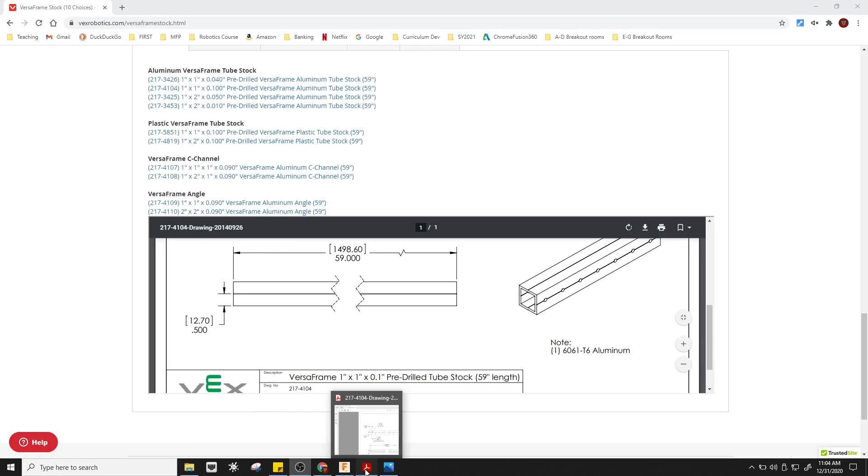In this case we've done a custom example of a VersaFrame. So this is the VersaFrame stock. We get it from Vex. If you scroll down they have a bunch of options, but then they also have these drawings of the parts themselves, and that is basically what we're going to be making.

Now we are CADing up the thick VersaFrame extrusion. That's this part number 217-4104. And there are a couple things that I'd go over with this drawing. One, I don't love the layout for this particular version. For example, it does the front view, the right view, and the bottom view.

I generally prefer to have the isometric view in the upper right hand corner and then run front, top, and right. But that's a preference of mine. The thing that I do like is that they've got these long break lines, and we'll go over how that's a problem when we make it. This is kind of the guidance that we used for making the VersaFrame part.

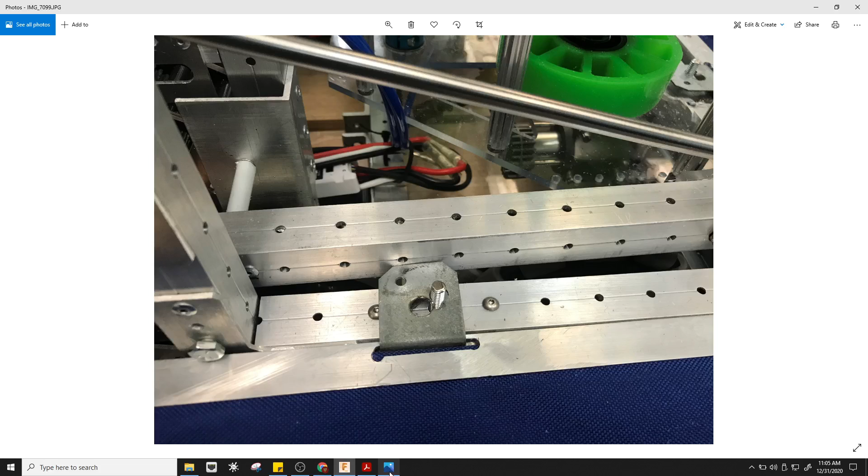So we've got the VersaFrame part in our CAD, but one thing you're going to notice is that the holes are different than those in the drawing. So if we take a look, there's actually kind of three versions of the Vex VersaFrame at this point. In general, we'll use a thin piece. This one actually ends up being thick.

It is a 40 thousandths thick VersaFrame, and previously the holes were offset on that one and on all four sides, but now they are not offset, but they're still on all four sides. And the thick version, which this piece is, originally had a side that had no holes, and then a side with holes. Now all sides have holes, and the holes align. They're not offset, so the top and side holes are the same.

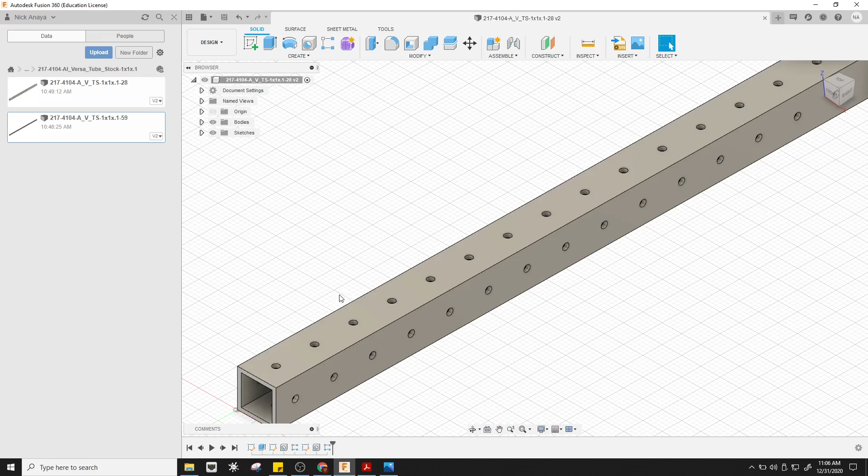So that's actually what we've CADed here, where the holes here and here are offset ½ an inch and then an inch apart for all of the holes, and that is what we've CADed, and this is what we seem to get when we buy it. So that's the disclaimer that there's some different options for the way you receive this. This is the way that we've received them the most recently.

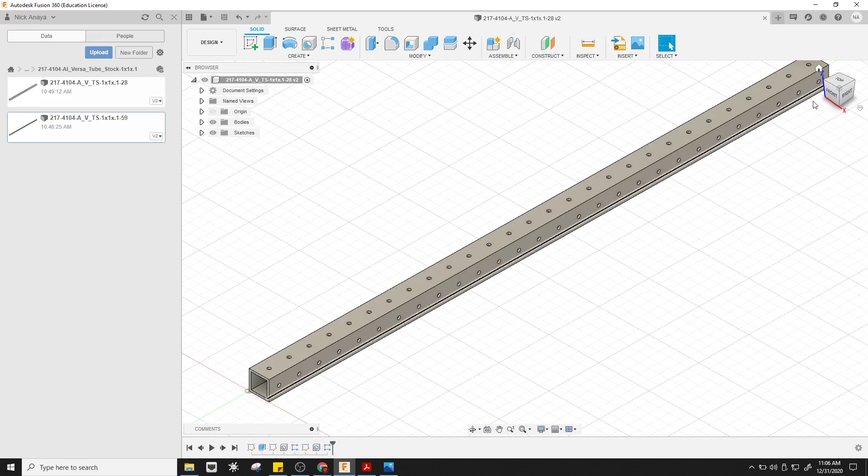So first thing I want to do is talk about our sides. So we created this extrusion with our Z and X axis set up, with the top looking down here, where then our origin is in the back left hand corner. Now this is very useful with respect to CAM.

So if we're going to end up doing machining on the top of this, then in general we would touch off that back corner and set that to our origin, and then set up all of our measurements from there, because when it is in the mill, we're going to have that back left-hand corner. The back side is going to be against the fixed side of the jaw on the mill.

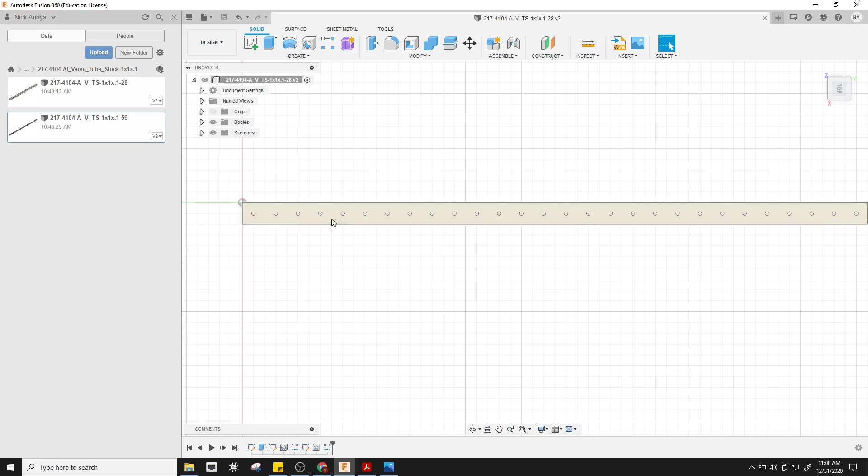And then however far left we put it, that'll be kind of our X0, and so to the right is our X positive, and then down towards us is our Y negative. And then up and down with respect to the part is going to be the Z axis. Okay, so that's how we've got it laid out in our CAD file.

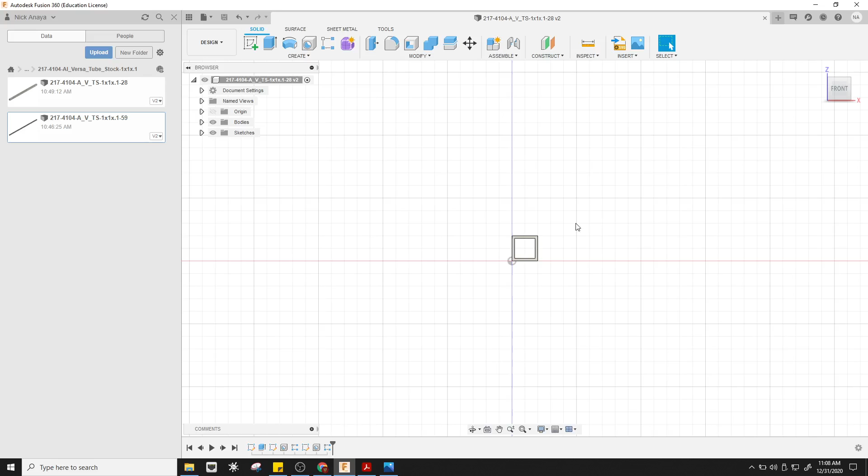However, when we do that, then we end up with the end of the part being considered the front, which is not ideal for us. So in this case, we would prefer to have the front have more information about the overall dimensions of the part, and so we're going to redefine the front as the first step here. So if I click on my view cube on the right hand side, I'm going to right click on this and say set current view as front.

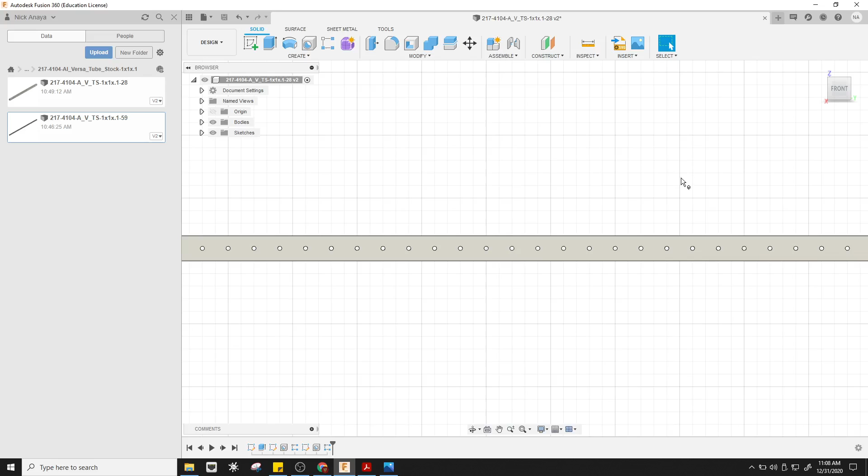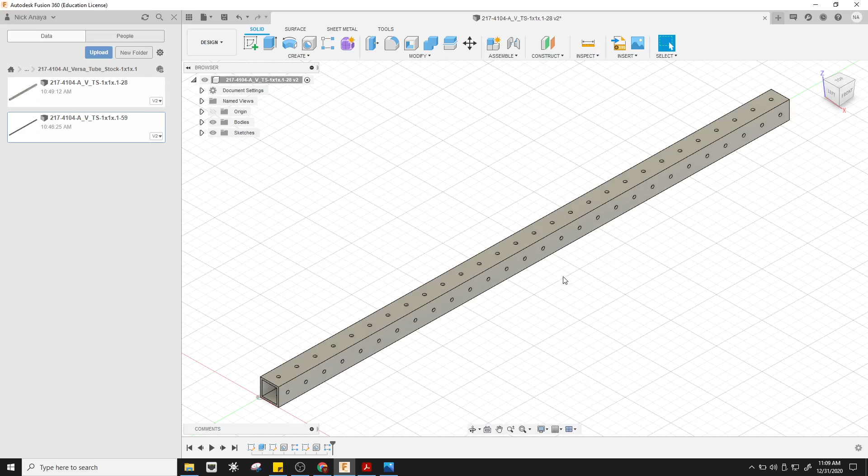Now when I go to my home position, I've got right, front, and top, and that is all presented as such. And next I'm going to go ahead and create a drawing. So if I click up under design, drop down to drawing and say drawing from design, then that's going to give me an option. Now for the drawing itself, we're going to use a template.

We've imported a template for our use, and we've set it up kind of the way we like it. So I'm going to go ahead and change the template from scratch to Lindblom drawing, and then the contents are the full assembly, and we'll click OK.

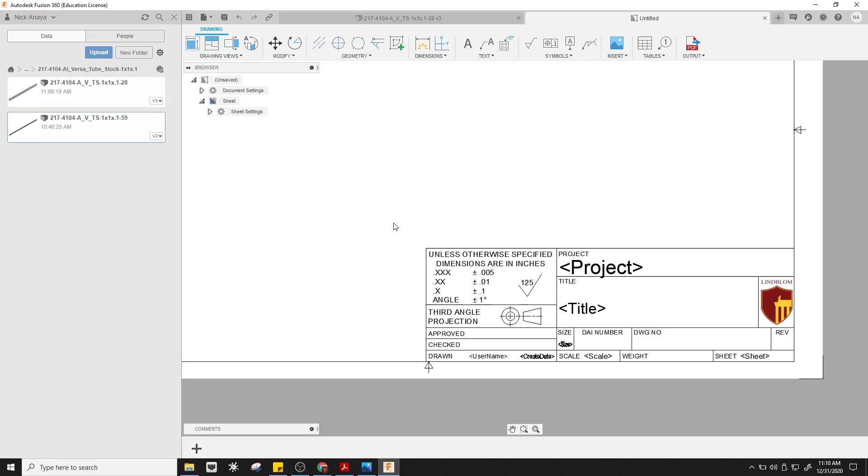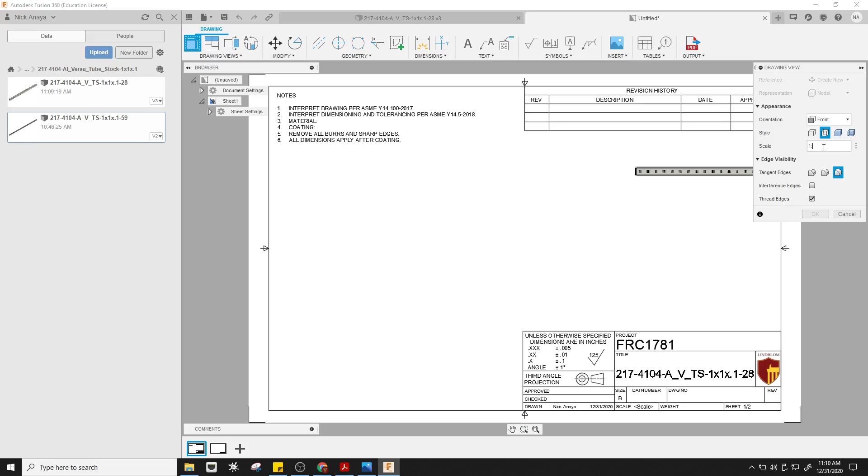So the first thing I'm going to do is I'm going to go ahead and place the front view. I want to change the size of this to maximize how much will fit on the page. Looks like I could probably get to 3:1 or 1:3 reasonably. So I'll go ahead and place the front view there. I will place and then I'm going to make sure, click OK. That sets up the front view.

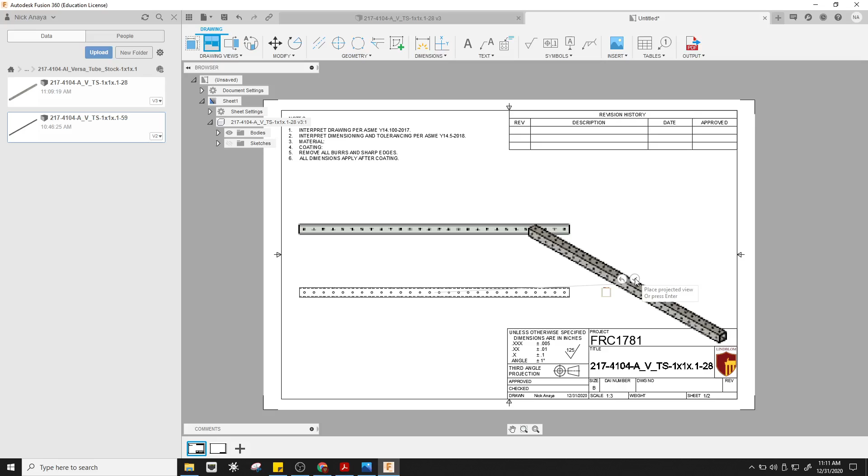Then I'm going to go ahead and create my projected views. So up top, click projected, click on this, place a top view, and then move to the right and place a right view. And then click the little check mark. And that is done.

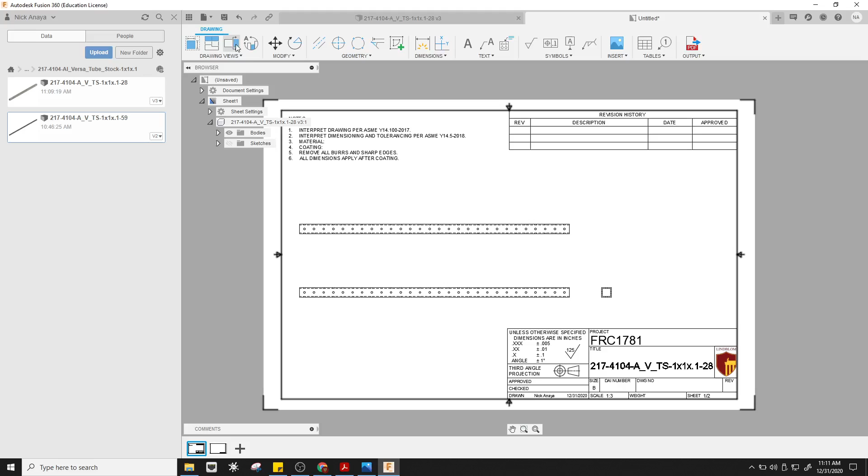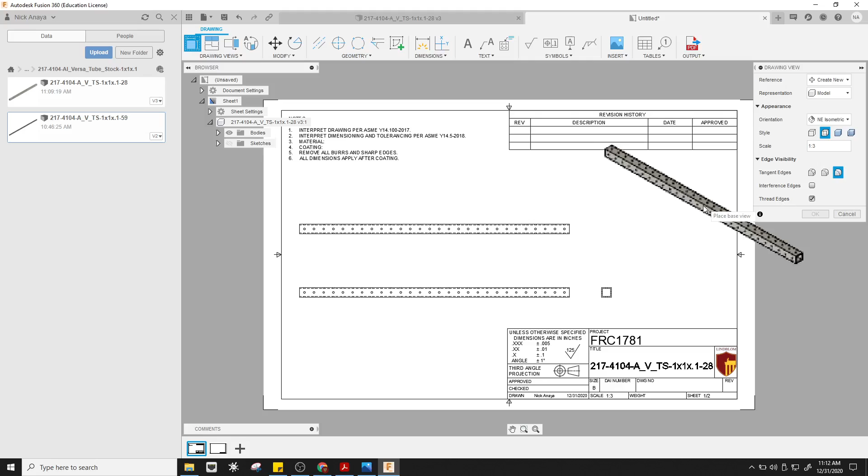So now I want to go ahead and place my isometric view. So I'll go ahead and pick this base again. Then this time I'll change this to, again, 3. I want to change the orientation to be, say, home view. Now that's a little long, so actually, let's go ahead and switch this over to northeast isometric. So this actually shows me the correct orientation.

I'm going to turn on my shading in this case. So now looking at this, this is the front, this is the right, and that is the top. 1:3, that looks good. So we'll click OK. So now I've got my isometric, and I've got each of my views here, and then the end view.

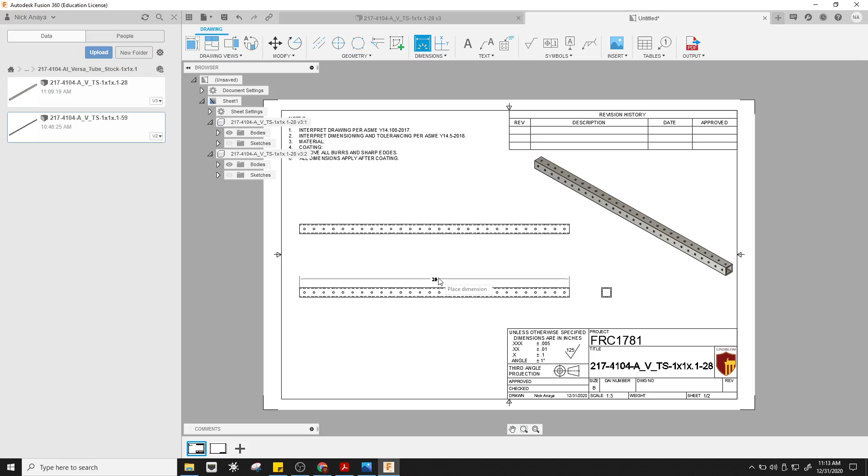Now we're going to go ahead and we're going to place our dimensions. I want to start off doing the overall length of this object. So in this case, we are 28 inches long. That's good. Then I'm going to go ahead and do the height of the object, which is 1 inch. And then I'll do the depth of the object, which is 1 inch. And now I have the primary dimensions of this extrusion.

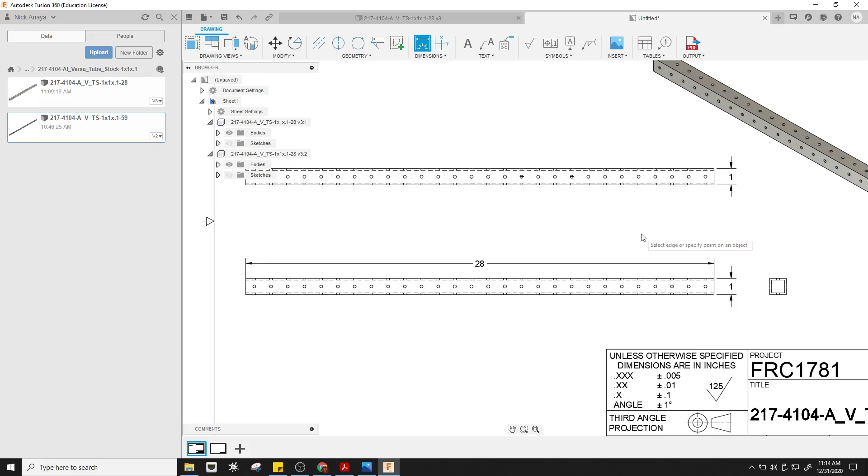That's all right. What we'll end up doing to kind of help us with this is we'll end up using our detail views. So in this case, we go up to here and we select detail view, and we're going to first do a detailed view of the end. And so we'll capture this by clicking on the center, then clicking again, and then getting this detailed view. And then in this case, we're going to go up, we'll place it, and then we're going to scale this to be, let's try 2 to 1, or at least 1 to 1. All right.

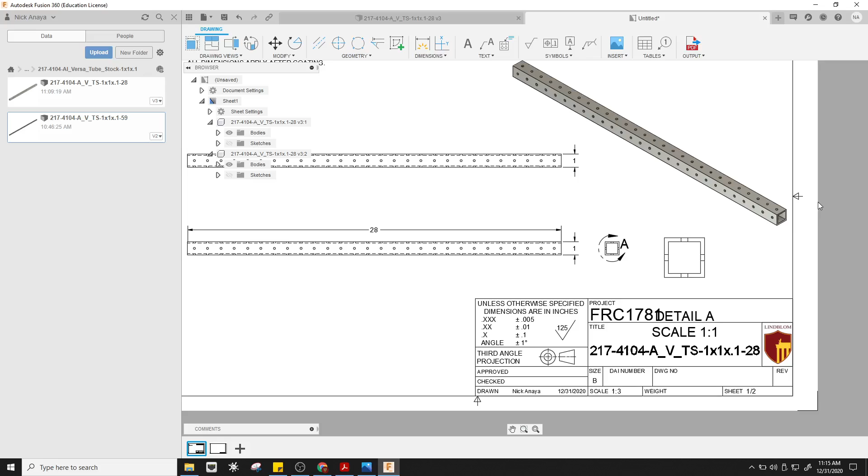And so what that does for us is now it allows us to go ahead and apply the dimensions that would end up being really small in a larger format. So for our height dimension and our depth, we've already got our 1 inch and 1 inch. So we don't really need that. If we want, we could take a look at the other drawing and see they're identifying the wall thickness. They also put the overall dimensions there.

That is another option. So instead of drawing it at the end of the extrusion here, they put it on their drawing. So in this case, perhaps it makes sense for us to do that as well. So I'm going to go ahead and delete this and delete this one. And then I'm going to apply those dimensions on the detailed view. So here, click 1 inch, here, click 1 inch, and then in this case, we'll go ahead and we'll do the thickness. 0.1 inch, and the thickness here.

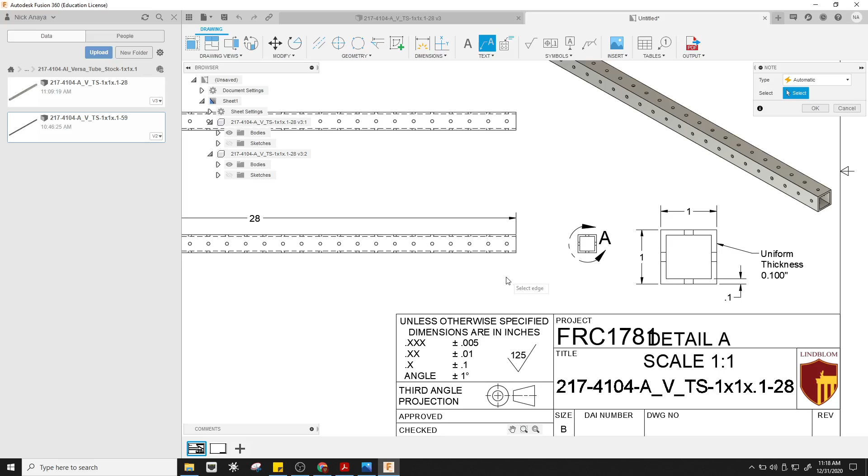All right, so now we have a note that says it's uniformly thick, we have that dimension, we have the height and width of the extrusion, and that is all applied in this detailed view. All right, so we'll click OK. Now we're going to go ahead and do a detailed view of this section so that we can basically show the holes and everything for the extrusion.

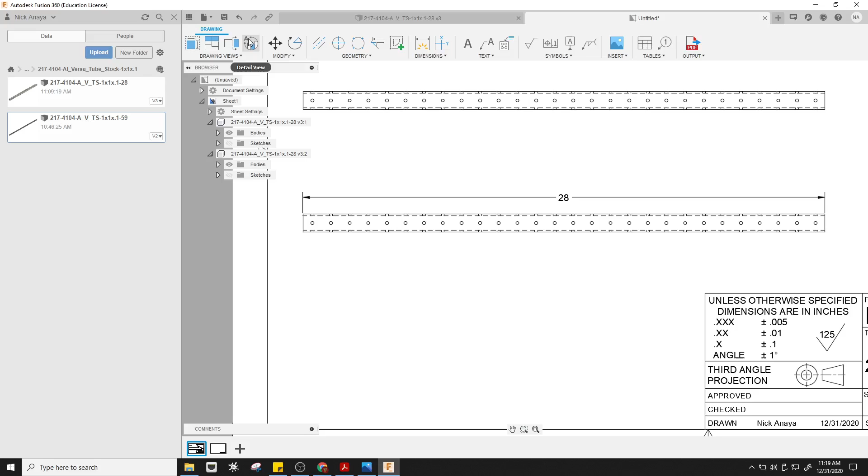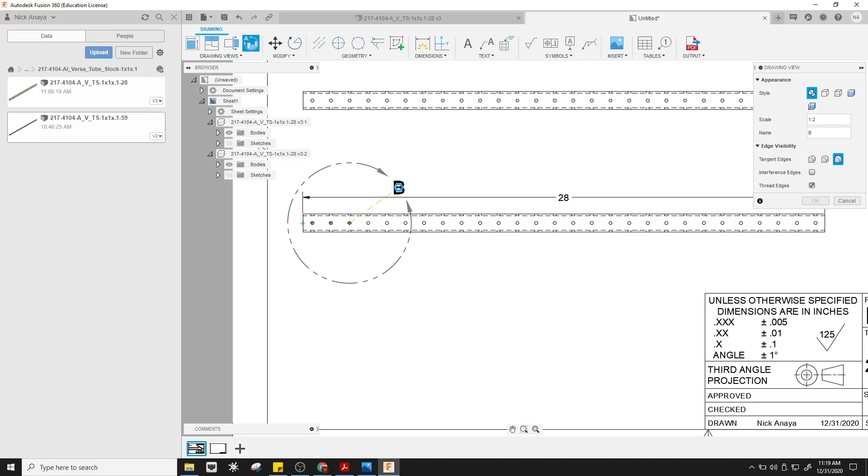So we'll click detailed view again. Click on this object. You always click kind of the center of where you want the detailed circle to be. So I'm going to go to this other hole and then give myself that much room. And in this case, let's change it to 1:1. And I should be able to place that here. And click OK.

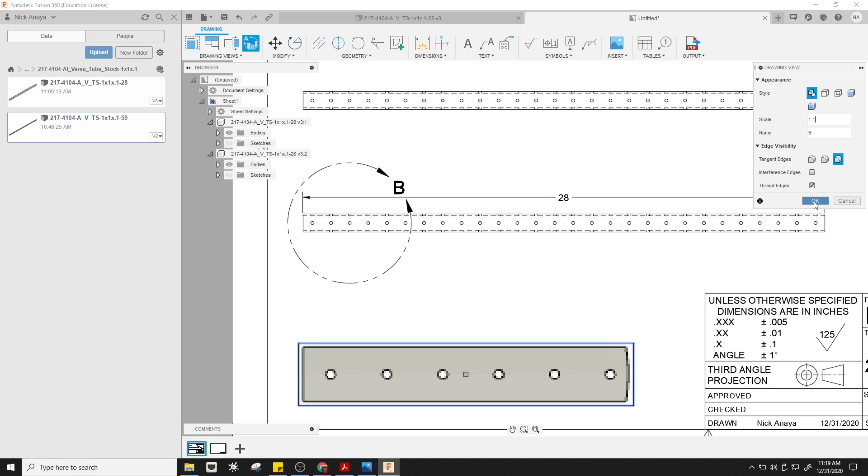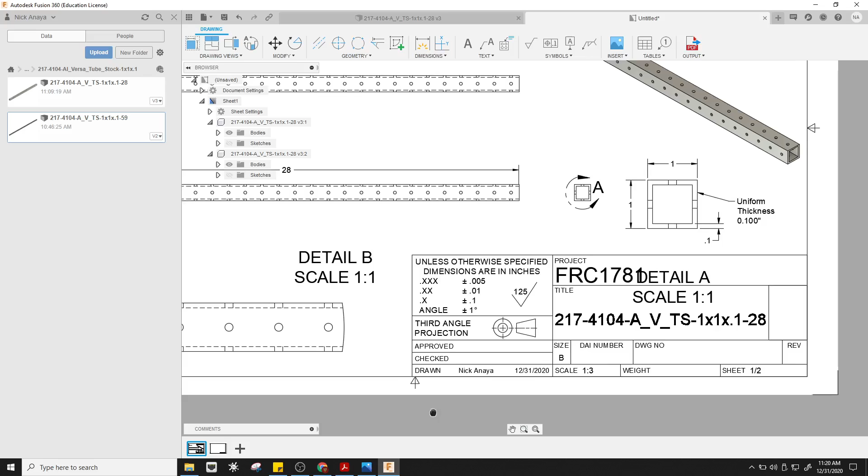So now I have a detailed view of the object. I need to move this note here. That's actually on the page. And also I need to move this note onto here.

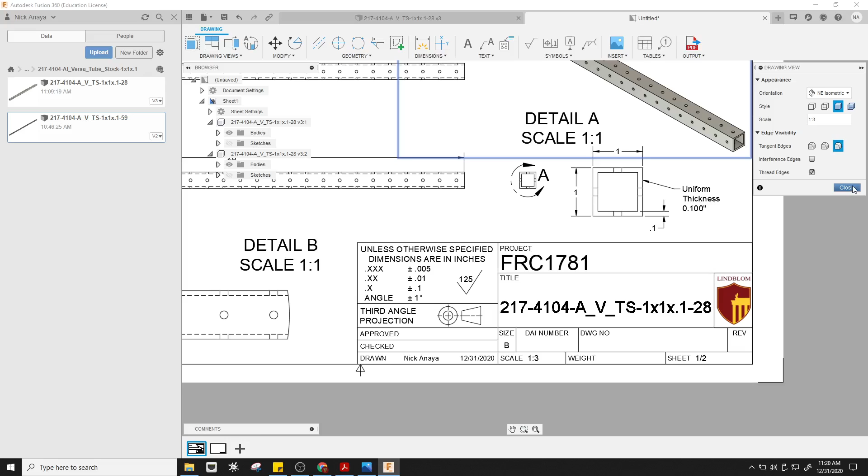Okay. So now that I have this detailed view, I'm going to go ahead and add additional dimensions. The first thing I want to do is add center marks to each of the holes. So here. Go ahead and just do those 5.

The next thing that I'm going to do is I'm going to dimension to the center line from the top edge. So here to here, and then set that dimension there. In this case, I'm going to try to slide this out just a touch more. Move this guy closer. All right, so now I have the offset for the hole.

And now the last thing I'm going to do is I'm going to end up with my chain dimensions for each of these holes. So I first click and add a dimension from the edge to my center line here and pull that up. And then I'm going to move this guy to the center.

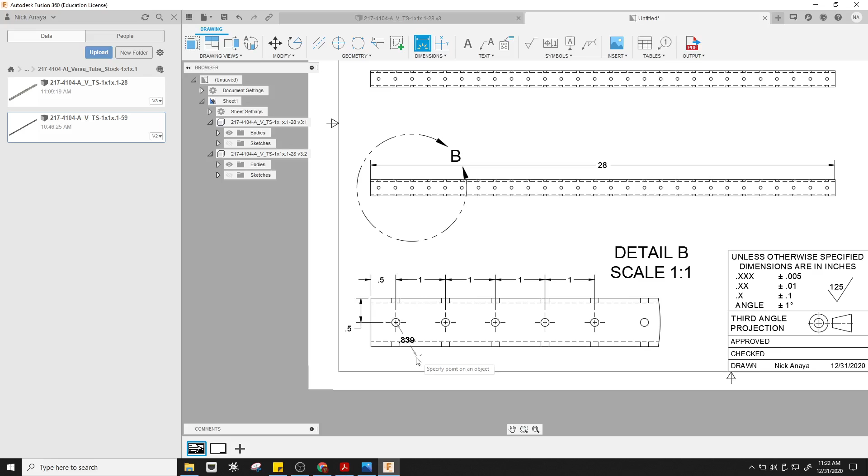And now the last thing that I need to do is I want to go ahead and provide a dimension for the hole size. So I will click on the edge of the hole and pull my leader line. Actually, that ended up being the wrong way. So dimension. And then I want to come off at an angle, click, and now I have the dimension for that circle.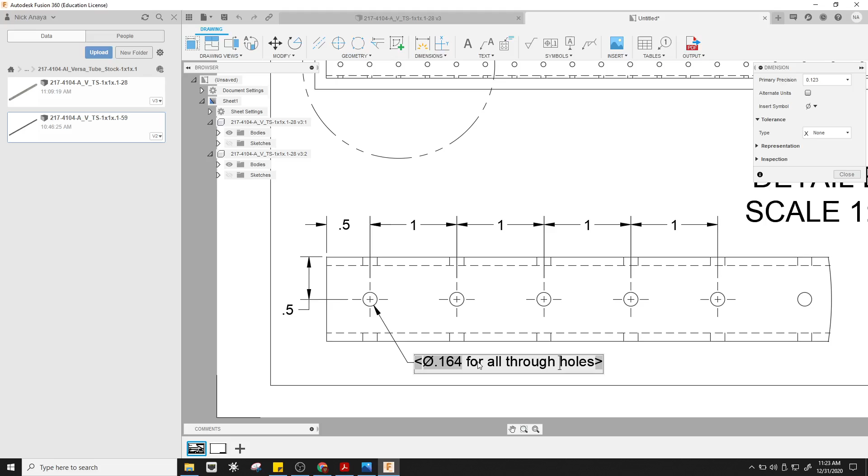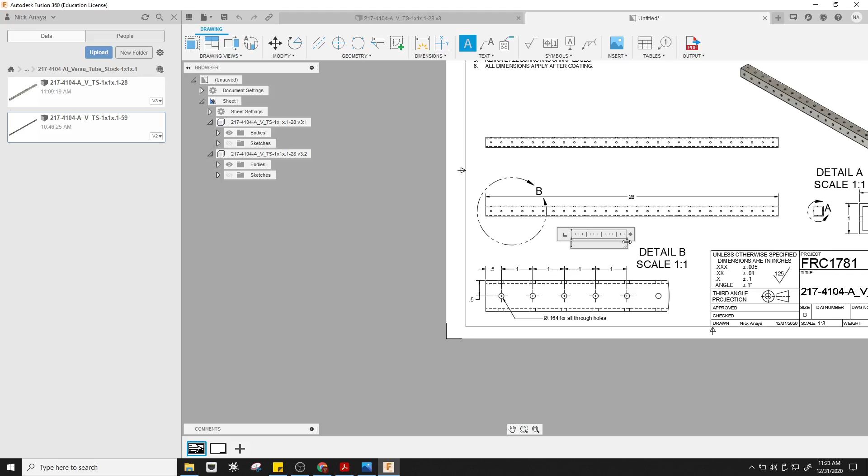If I hit escape, then I double click, I can actually then add a note that says 0.164 for all through holes. And so now that kind of covers all of the different holes. It gives us our chain dimensions, and we might add one other note, right here, just to say all holes 1 inch spacing. I can change the size, maybe make it 0.15, a little bit bigger, and then click.

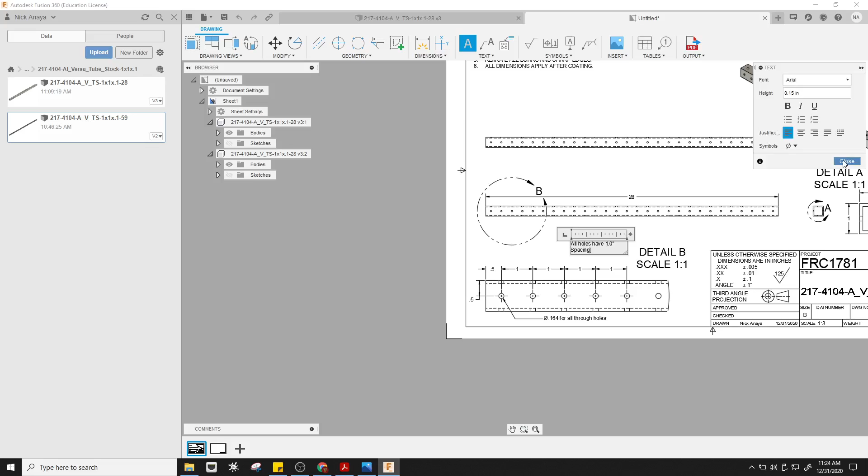All right, so now I have my drawing. I have the detailed view that gives me the thickness and the dimensions. I have a detailed view down here to show where all the holes are. And then I have the overall length as well as then the depth and height. The only other thing that I'd probably add is then I'll update the notes up top to kind of mention the specifics of this part and how it is made.

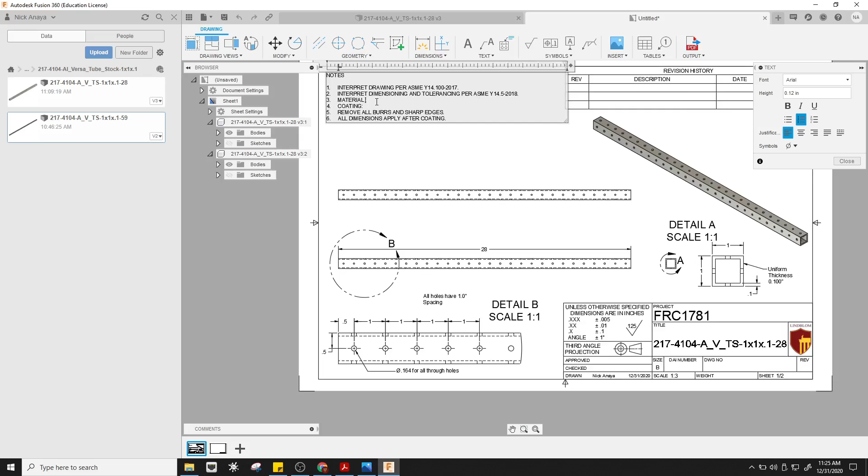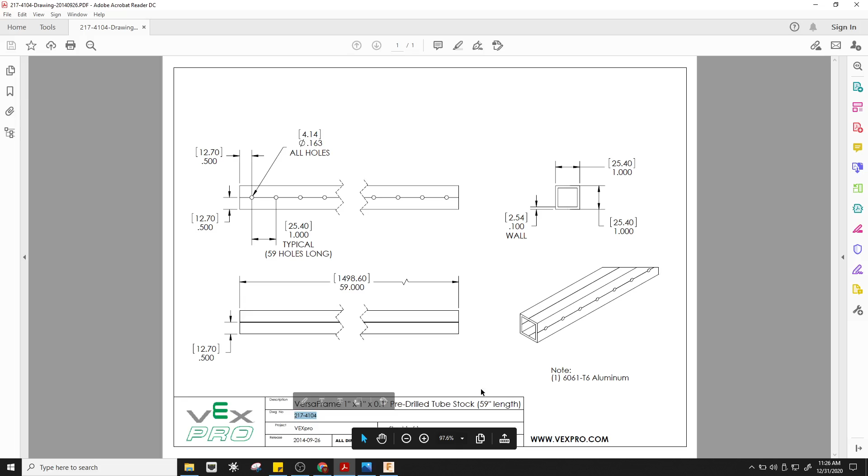So in this case, I can set the material. In this case, I believe, look at the other drawing, it is 6061-T6 aluminum. So I'll go back to Fusion, material. We've got that. Then we'll take a look at the other notes. In this case, we could say that this piece is made from this part number. So we're using this as our raw stock, this length of 59 inches.

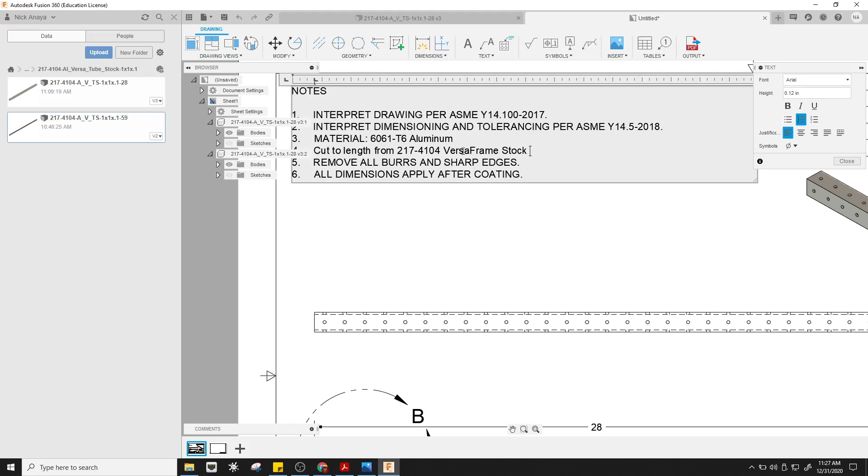So we'll go ahead and, instead of talking about the coating, let's say cut from 217-4104, and grab the 59-inch VersaFrame stock, 59 inches.

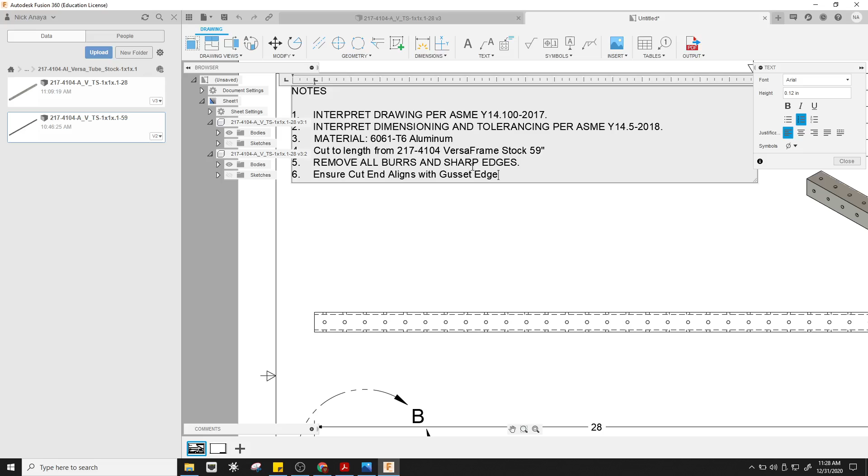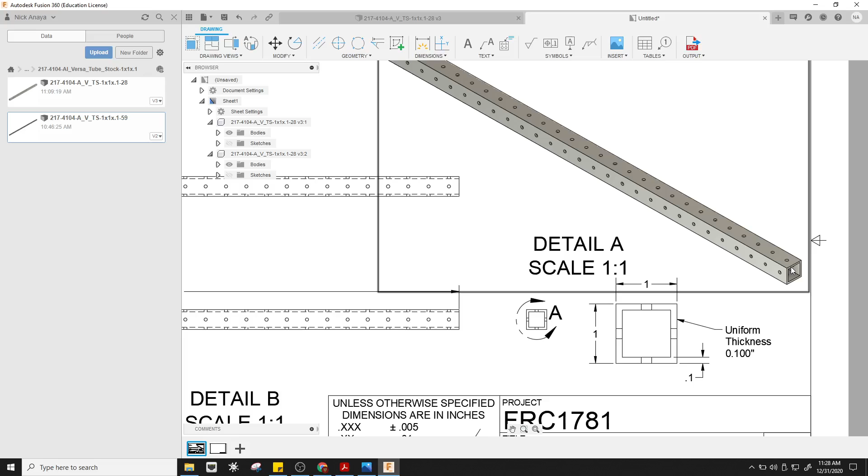And then in this case, remove all burrs and sharp edges and ensure cut end aligns with gusset edge. So it's really important that the end of the extrusion, we're going to have a gusset on it, and if it's too long and it butts up against another piece, then if this end dimension isn't pretty much right on, then we'll end up with a misalignment of the holes. So that final note is talking about that. Then we can fill out our revision.

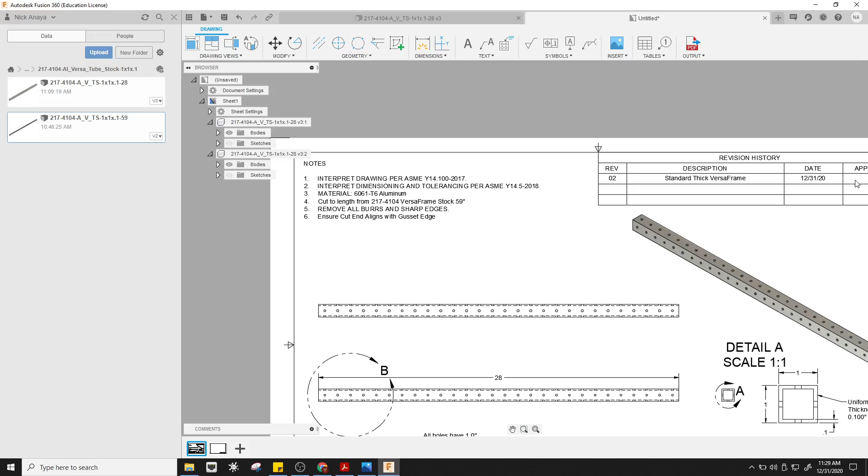So let's call this Rev 1, or this is, it's actually under revision 2. Description, standard VersaFrame. And then I'll go ahead and put the date, 12/31. And then we'll need to have somebody else probably approve it, but for now we'll do TB1.

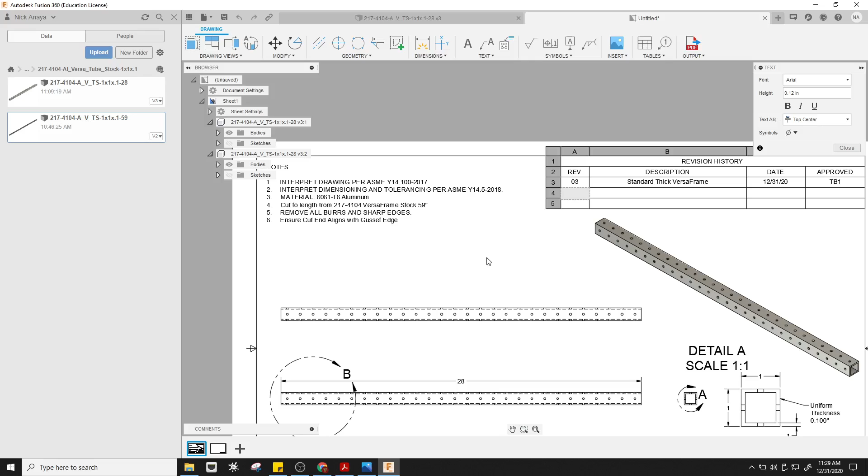And so this is our rev. It matches with the revision. Oh, actually it should be Rev 3. So it matches the revision of the drawing of the actual part number. Or we could say this is the very first time we're making the drawing and make it Rev 1. I don't know. We haven't decided that much on the drawing numbers. We'll call it Rev 1.

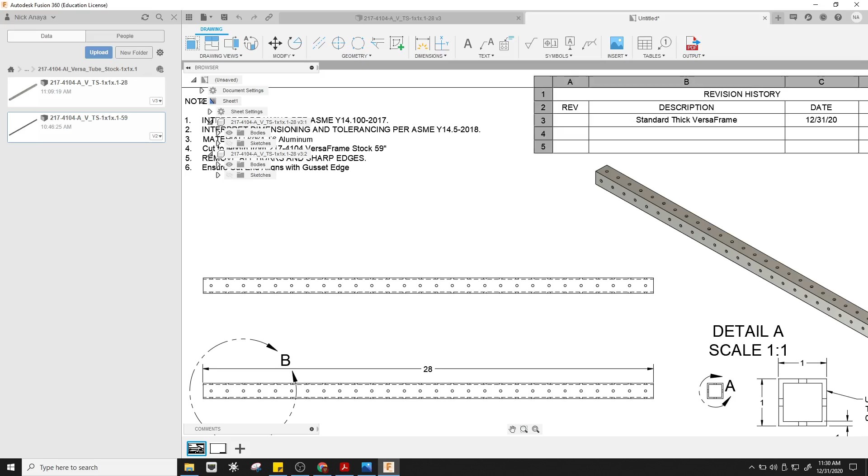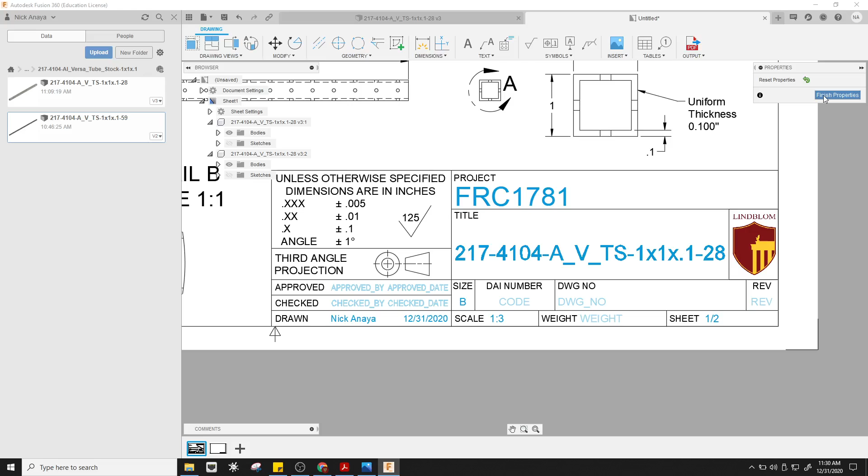And then version 3. That way we've got the drawing rev and the model version. That makes sense to me. Here's our team number. Here's the name of the stock there. Title of our part. And it looks pretty darn good. So that's how we create our drawing.

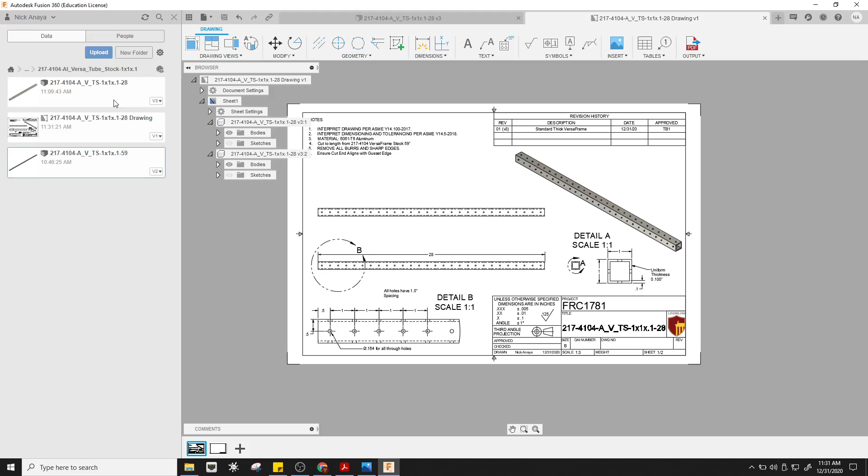Don't forget to save. And then we've got the drawing we'll show over here. You'll also see if you open this up, there'll be a list of drawings that then you can open through this page. And that is it.